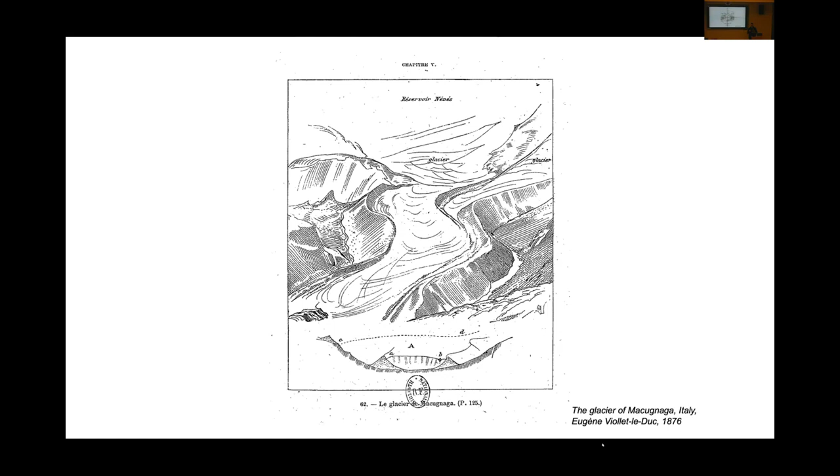He described the Mont Blanc, saying that in 1875 it was such a wreck in a way, because it had been demolished and flattened. We had taken the trees out to make wood, to use the wood. We had made fields to make cultivated spaces. And he tried to understand how to change the Mont Blanc and restore it, proposing new small infrastructures, understanding the torrent beds, and proposing very small dams that could give more thickness or depth to the landscape, to the natural functioning of the whole mountain.

So it's in a way the work we've been doing for many years. This is an installation we did on the invitation of Hashim for Venice in 2021. It's a big piece we called The Earth is an Architecture, and we wrote a book about this, trying to look at the Earth as an architecture, meaning all these phenomena are totally entangled now, and it's difficult to conceive architecture as something set or put on the Earth. Rather, architecture is the shaping of the world itself.

But there are many scientists, like Zalasiewicz, for instance, who are explaining—he's a geologist—that the strata of cities are in a way like mountains or volcanoes. It's a big amount of sediments brought to a special point in a very limited amount of time. So it's also a comparison to the way the Earth is created.

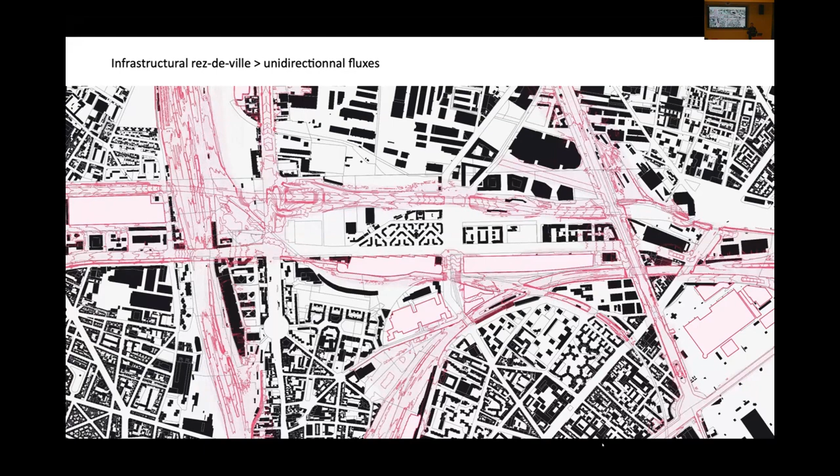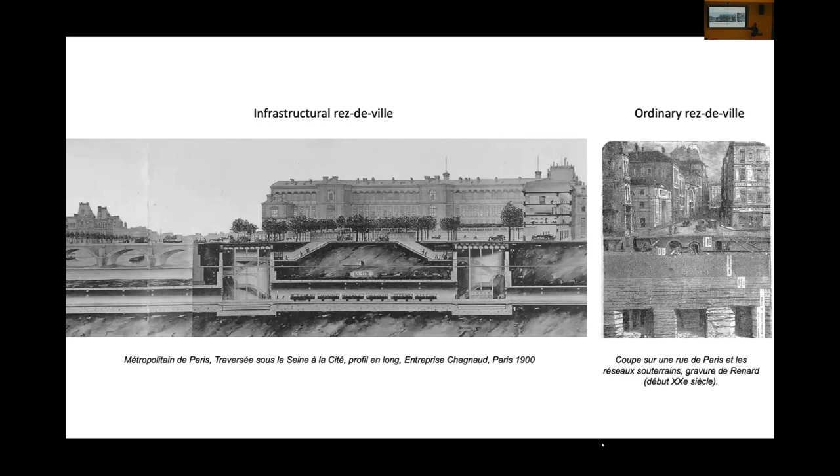So this new discontinuity needs to be understood and explained and represented, because it's quite complicated for us to understand this kind of very large phenomenons.

And as I said, using this kind of method as Viollet-le-Duc did, we're also trying, of course those are metaphors, but we're trying to use words that come maybe from a more geographical and at the same time architectural realm. So those infrastructures, they function as the riverbeds, as the continuous beds, because our era has been obsessed with total continuity, and the infrastructure seeks for the continuity that will never be stopped.

We've talked about cars before, but every kind of moving element seeks for total continuity. I mean, the more perfect infrastructure that we can find is the sea, of course, and we managed to make the sea totally continuous by digging different canals.

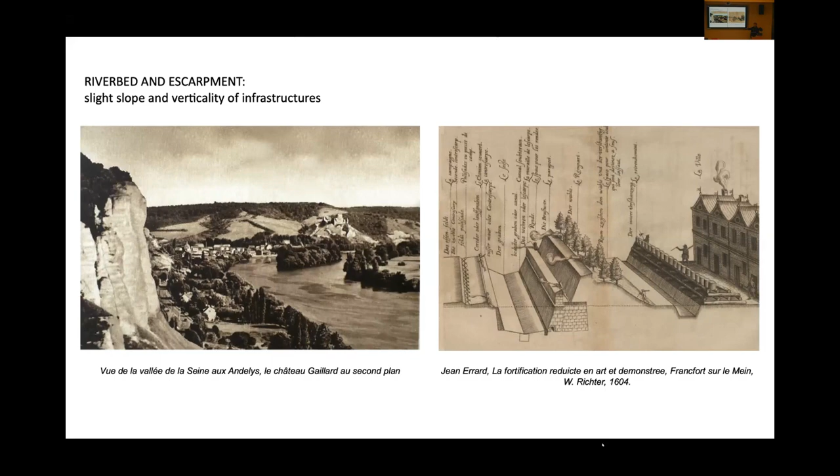So the riverbed and the escarpment, the scarp and the counterscarp that you can find in military architecture is something that is quite interesting, because with this continuity, you create a discontinuity, you create a wall, like in the river, you create something that is elevated and that creates the discontinuity. So this is one kind of word that we're using.

And a second word, and we could choose another one, but we found that this one is quite interesting: it could be the counterfort. The counterfort is also a military word, but it's the idea that with the infrastructure comes some kind of replica of the infrastructure, some kind of counterforts, like you can see in this representation of a fortification, where you can have all the replicas and the expanded effects of the infrastructure.

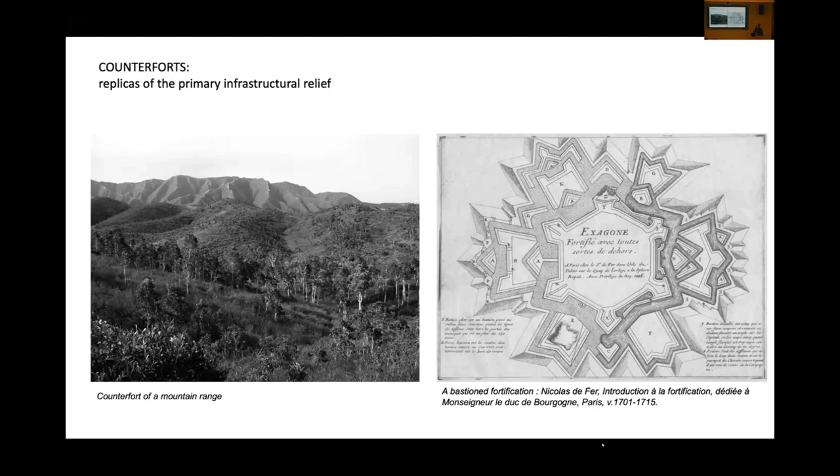And maybe Paris is the city in Europe where the embankment of the river has reached the strongest point, I guess.

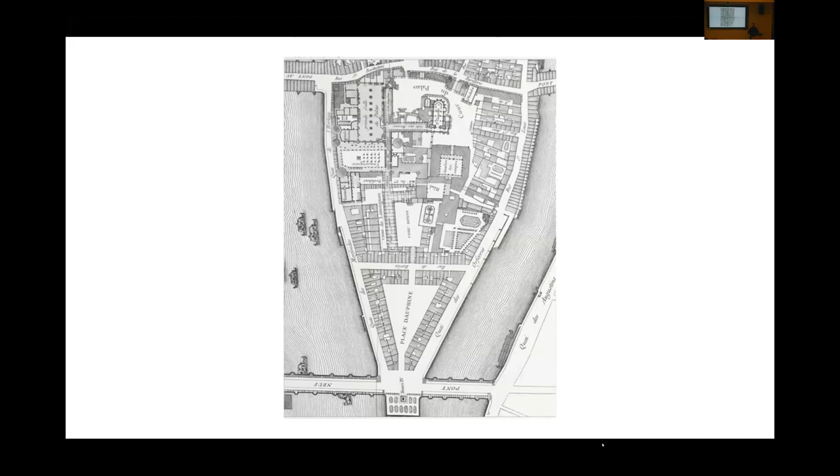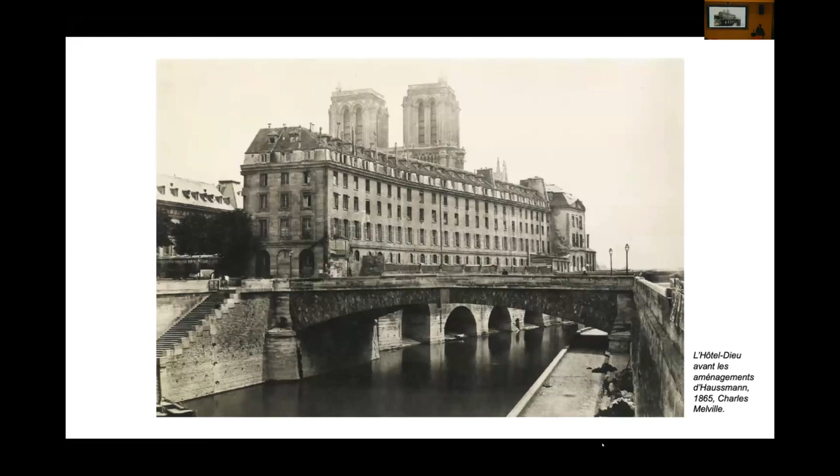But then later, in the post-war era, the car infrastructures came also along the river.

They are a total transformation of the Rez, a total transformation of the soil, of the ground. And those designs are very interesting, like the calculations of the cubatures that you need, the movements of soils that you need to do when you try to make a flat line to have the trains go all along this line. And the train also has this capacity not to have a very steep slope. So it's the continuity with the very slow slope.

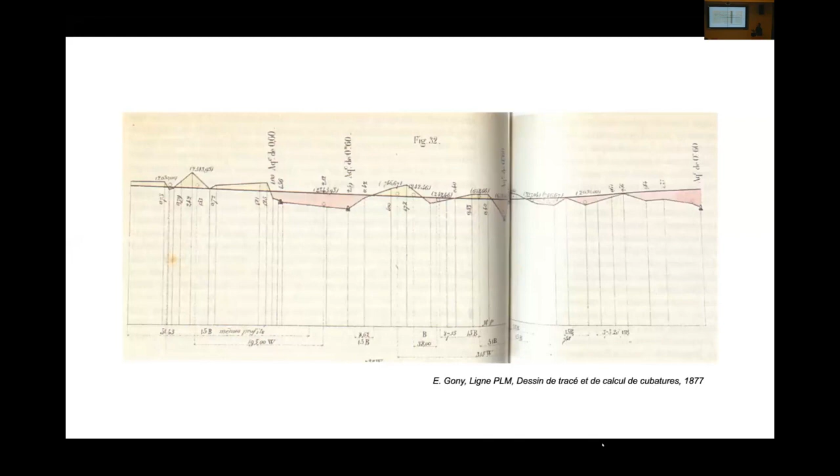It's almost horizontal. So the red and the yellow is the above and the under, and the earth that you move from one point to the other.

If I look closely at a part of Paris on the west north part, you can see the last wall of Paris, and you can see this inside railroad, the Petite Ceinture. This history is quite fascinating because, at the beginning, it was put on the ground level. When we first made the railroads, we put them on the ground level because that's easier, but also because this part of the city was non-urbanized land, so we could put it on the ground.

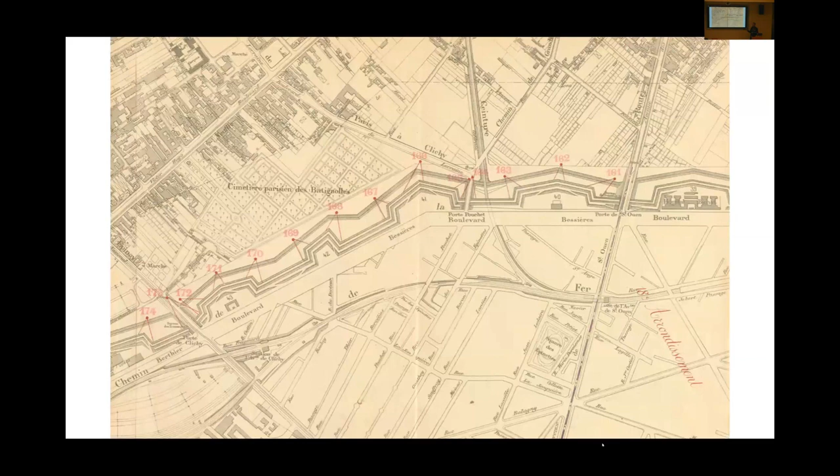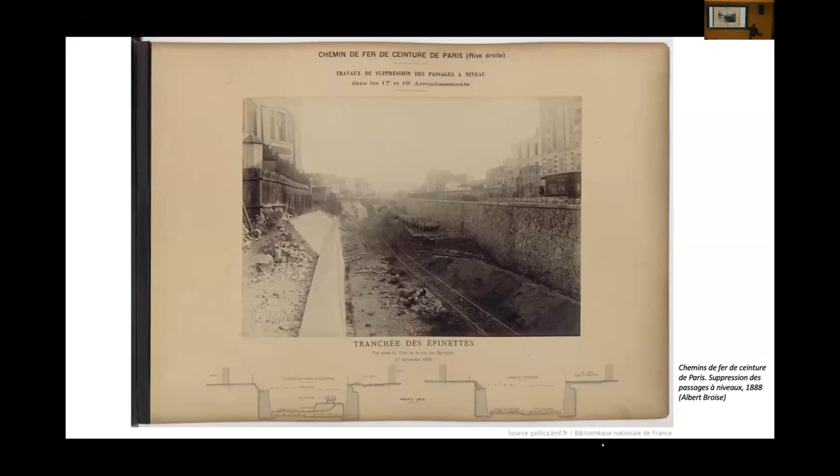But then we had to do elevated roads to go above, but also to dig again those lines of infrastructure to put them under the level of the ground. So those infrastructures, we do them, and then we do them again and again.

So it's also the idea that the infrastructure is a time device. It's something that helps us inhabit the earth. So this was the map of the Rez de Fer and the Rez de Route, because I have many things to show you still.

So Rez de Route is about the roads, the highways, and the main device inside Paris, which is the périphérique, the ring road that collects all the highways. We'll go quickly on this history. You see again the fortification, the last fortification, and the wall, which is once again a topographical system.

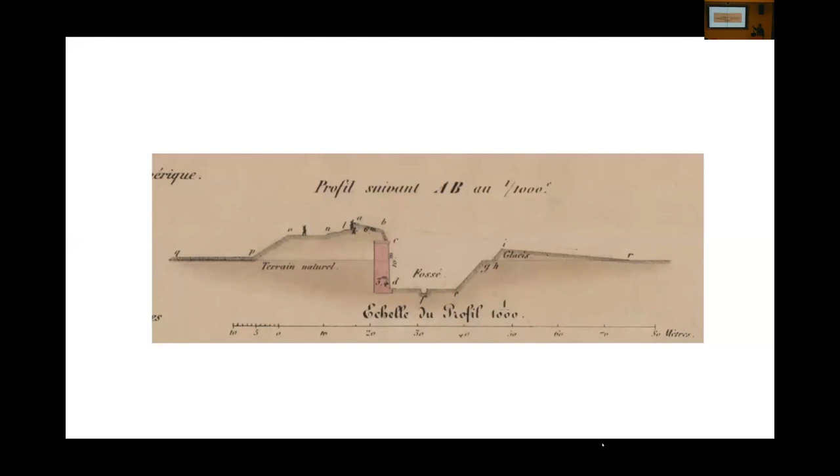This 35 kilometers wall, which is such an impressive piece of work, tremendous work that creates this geography. But then when we erase it, we try to flatten again the soil. And then at the end of this flattened soil, we put the périphérique.

And the périphérique is another kind of topography, more like hills, but also because the car can take steeper slopes, and it makes continuities with the existing fabric, with the existing streets. So it tries to connect a bit everywhere.

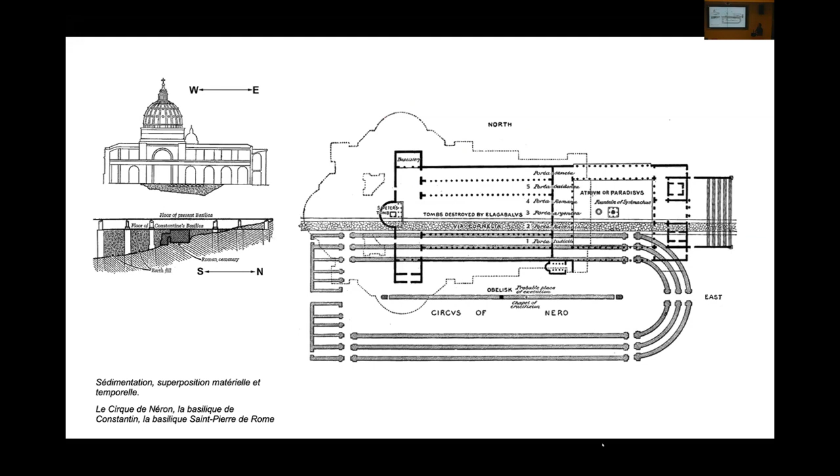Let me show you three kinds of explorations of the counterforts, as I called them, meaning different kinds of Rez de Ville, of Rez de Terre that could be imagined, coming from projects that we do at the office. We have several projects on these conditions, some of them are going on. I chose three just to explain three kinds of ideas.

Maybe the first one could be called over-edification. It's like the first stage of the counterfort. When you create the counterfort, you have the infrastructures. You see this part of Paris in the north where you have all these infrastructures, namely a triangle in the center of the railroads.

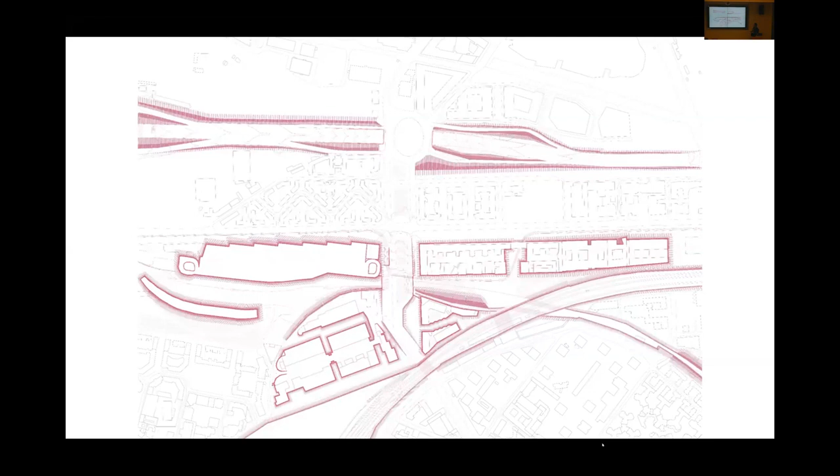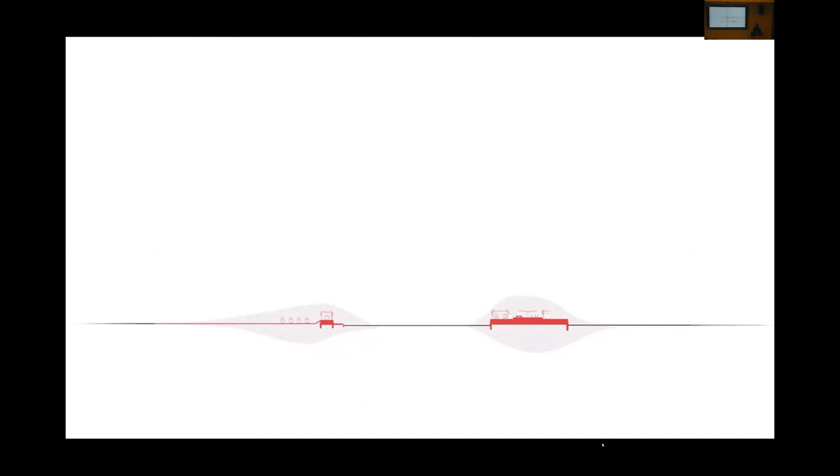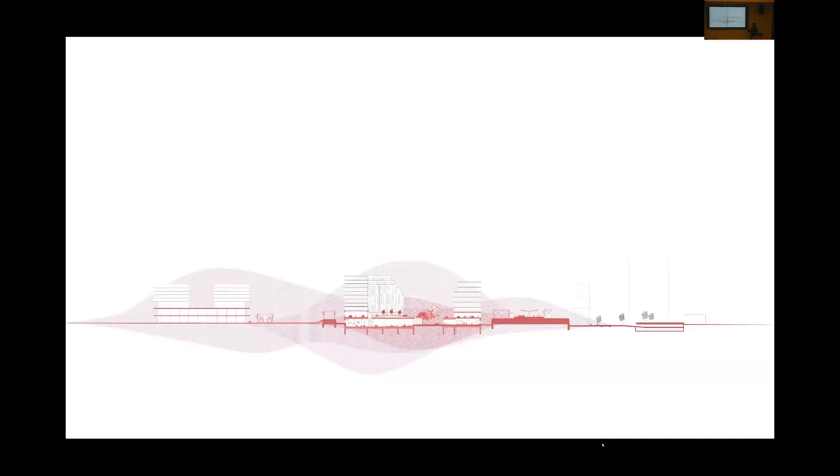And we did a project here, trying to create this Rez de Ville that would at the same time make something out of the idea that you have infrastructure around you, everywhere around. You can create housings and different kinds of uses. But this is the existing condition when you start to make the counterfort, where you have those elevated grounds on the two sides. And then there are first replicas, and then the project installs itself in the center between the rail lines, and it's trying...

I'm just going to show you some photos. It's trying to create some kind of thick Rez de Ville on 2 levels, and even more than that, with very specific programs, because one of the interests is that you can create, because you have thick parcels, thick programs, but also elevated programs.

It's also, for instance, about sports, but also about the idea that because this project is built in load-bearing stone, except for the 2 first levels that are in concrete because of the span that you can make in concrete, this Rez de Ville can become very specific in a way, very adapted to the conditions that we can find there.

The second counterfort is a project quite fascinating that we're working on at La Défense. So this is La Défense before the incredible infrastructure that arrived.

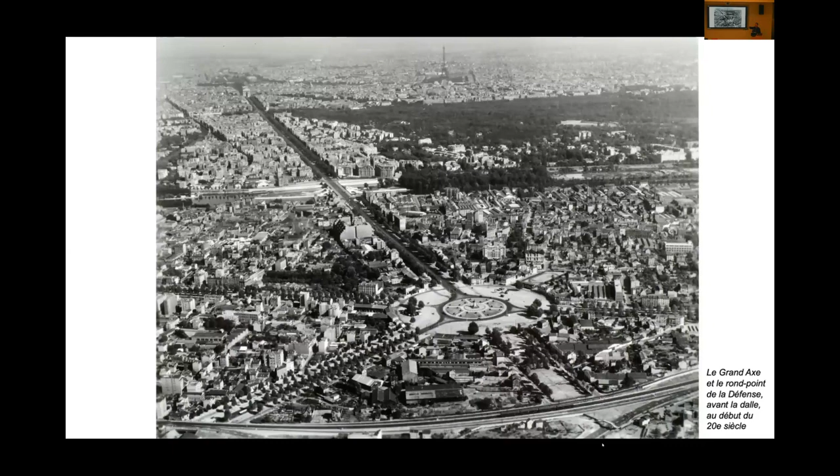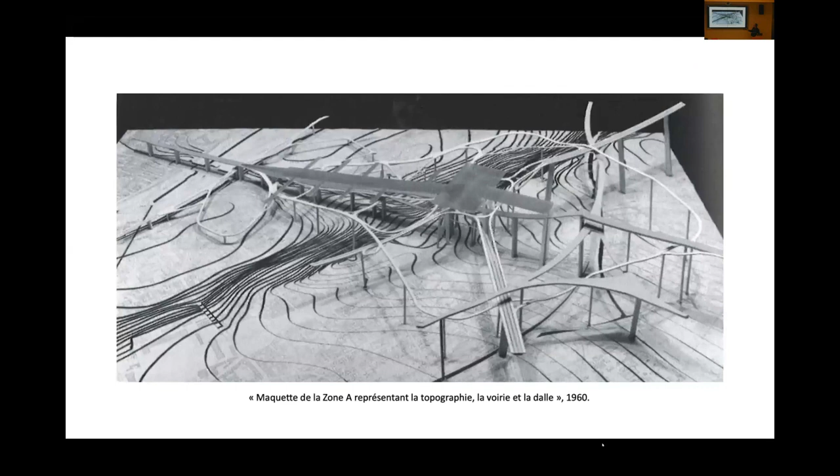It was a Rez de Ville, a traditional continuous Rez de Ville, and then came the first infrastructure, which is the train, the public transportation—you can see the kind of tunnel—and then everything was lifted up. It creates this kind of mountain, if I go on with my metaphor, and then the different counterforts arrived outside the infrastructure, but also inside. So it's a very total complex system, and it's also all the time changing on itself.

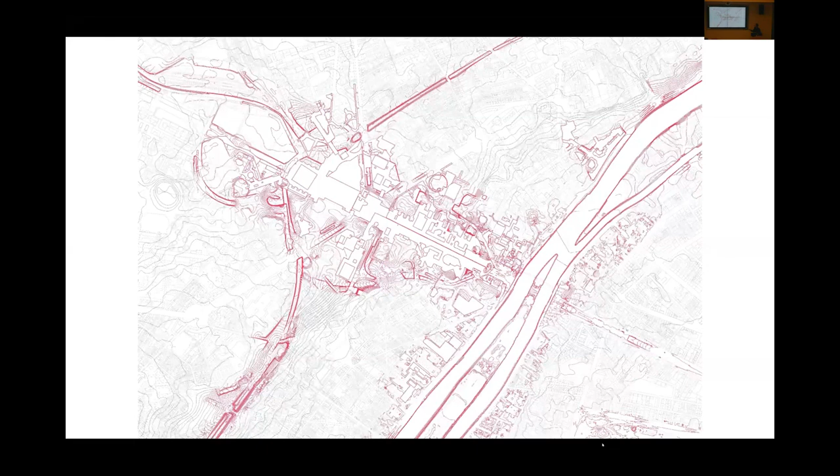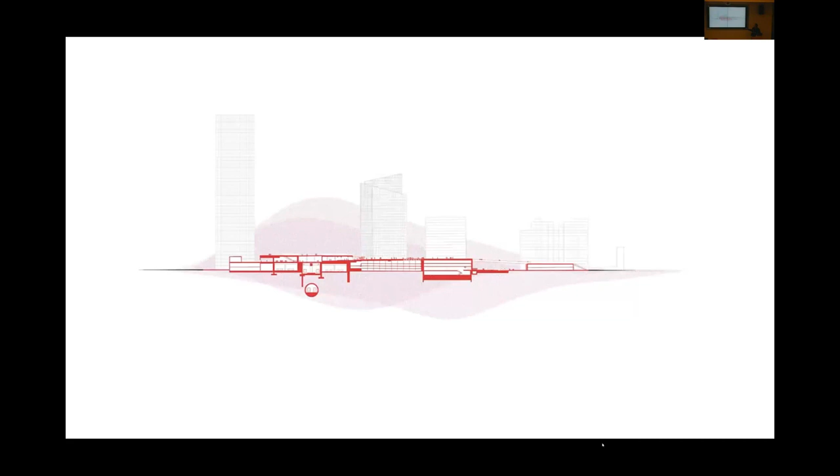So this is the Rez d'infrastructure, and we're working on a project where we're trying to find solutions. If I make the history very quickly, you have the first infrastructure coming there with the public transportation, then the different counterforts, and on both sides, the towers, of course, and then we're trying to find solutions to create new relationships. But those relationships—because we're talking about 15 meters high—it's not something that you can understand like a traditional city.

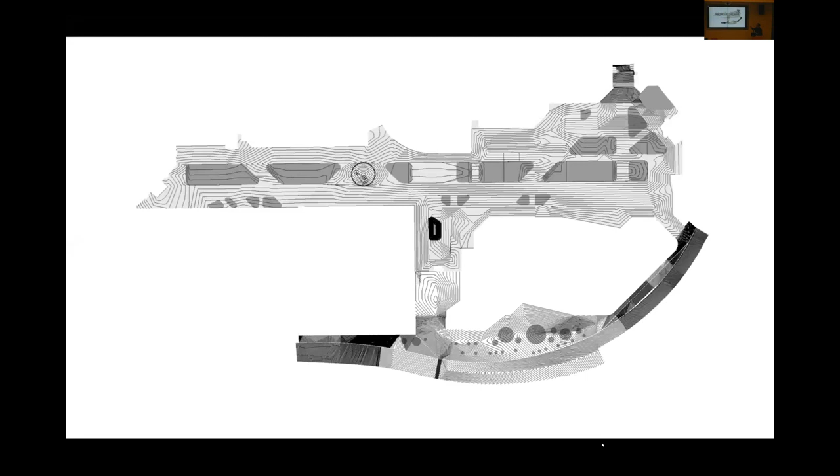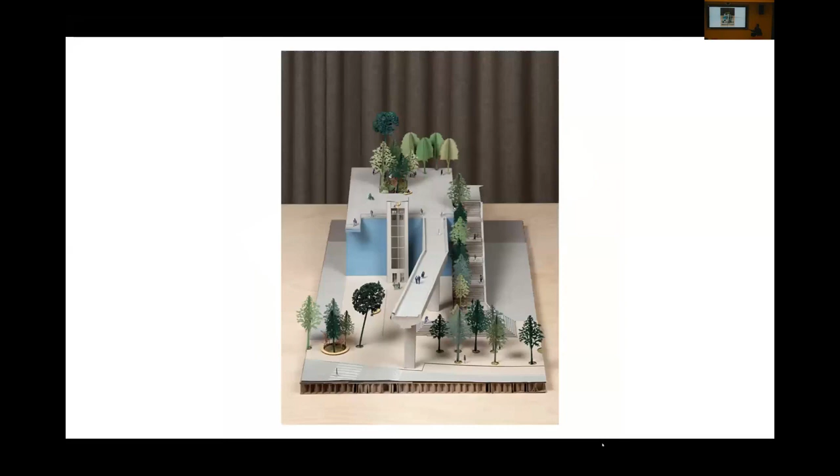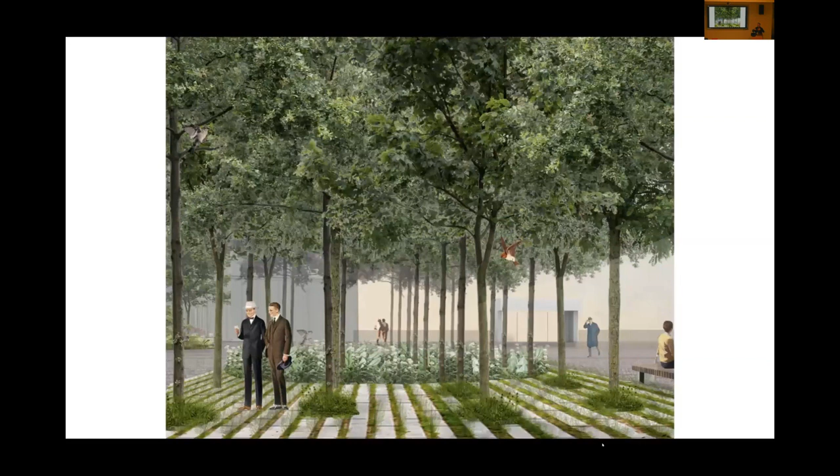We're trying to find a way to connect to the normal Rez de Ville. We're drawing this kind of topographical system, also this kind of axonometric views, to understand where to put the connections, but also where to put the full ground, the full soil, because those infrastructures have the capacity to create full soil situations, which is very, very important.

And the last one, because I'm late, is another kind of situation. So the second one could be called erosion, like you take out some material. And then the third one is still another case where you can find a new way of using existing infrastructure.

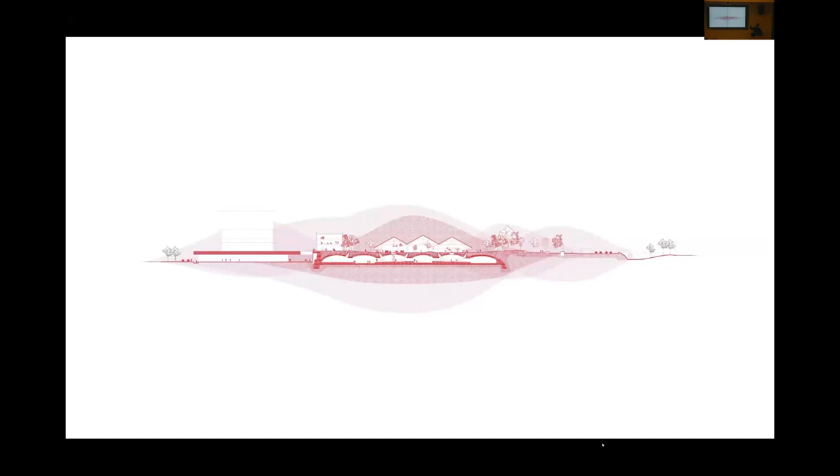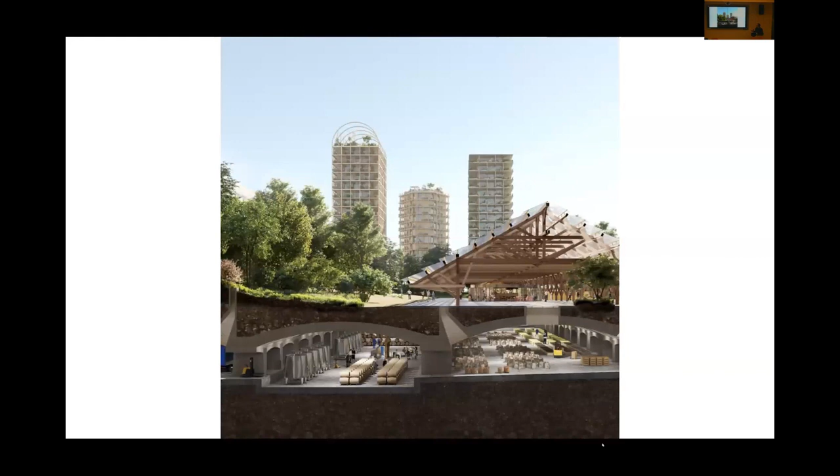And the idea is that because, of course, you could destroy this—many people would like to destroy this kind of infrastructure—you could also claim that it's not full soil until the center of the world. But it's so big, and like it was said before, size matters in these questions. It's so big, and so load-bearing, that if you put a lot of ground or soil on top, you can create this kind of new environmental situation.

Because, and I will finish with this, I guess this Rez d'infrastructure, Rez de terre, creates a whole comprehensive mesh or matrix in the city that could be thought of as a very strong environmental tool to address all the very strong issues that we're facing now. Thank you very much.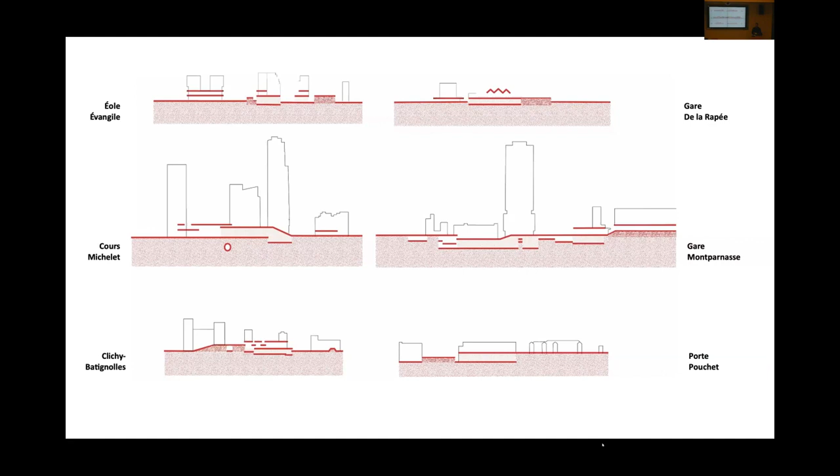I mean, I'm sure that the way it's difficult to orientate yourself in these neighborhoods sometimes can find a solution also in the way you retrieve the sense of belonging to the earth, if I can put it this way. Great, thank you, thank you.